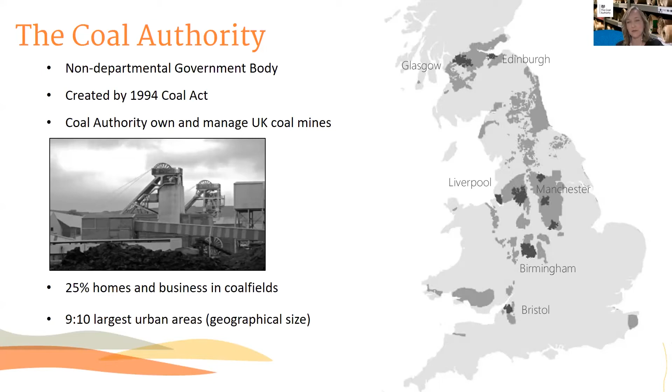So the things that we do: we have a £2.4 billion liability of coal legacies. This includes things like ground stability, so any mine workings collapse, we deal with those. We also pump and treat water and deal with water emergence, which I'll talk about shortly. Through the work that we do on protecting watercourses, we have cleaned over 400 kilometres or protected them from discharges from mine water, and we've also protected a significant quantity of water supply aquifers which overlie some of the mined areas.

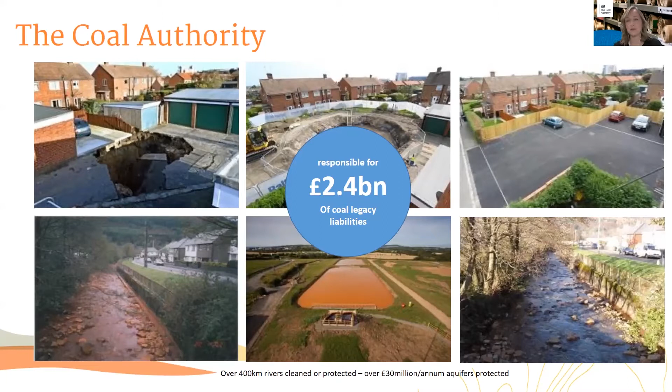So there's an abandoned plan archive which dates from the Coal Mines Regulation Act, which came into force in 1872. So that was a statutory requirement to deposit all of the plans with the Secretary of State upon abandonment. And the picture behind me is actually a picture of our archive, as is the one on there.

Somebody actually asked me the other day whether I was in a fabric shop, which it kind of does look a bit like, because a lot of these very old plans were drawn on linen. So we've got all those stored down in our head office, which is in Mansfield.

And in some places, there's quite a lot of mining. Given the amount of time that mining has been going on in the UK, there was mining taking place before 1872. So in some places we may have what we call unrecorded workings. So if we have records of seams that were worked round about that 1872 time, we can probably infer that there may be some unrecorded workings in the same seams nearby. So we're always mindful of what might be there in these areas as well.

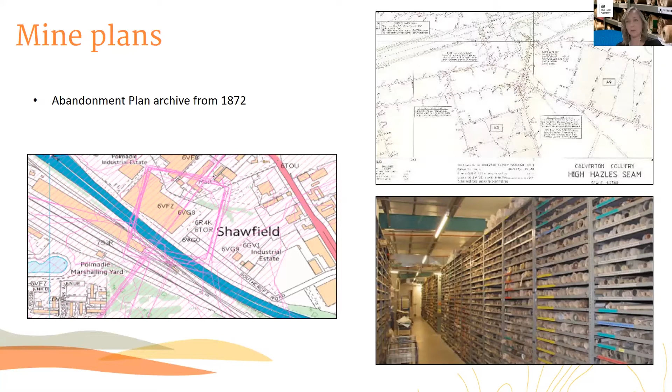In some areas, such as in Northumberland, when I've been looking through our database to get mine plans, some mines are still within private ownership, so they may be owned by a large landowner or estate at the time. So we may not have the plans for all of those, but a lot of stuff we have. The public can come and use our archive, browse our databases by appointment if you ever need any information.

So the coal industry spanned around about 300 years or so of intensive mining, and this ended in December 2015 when Kellingley Colliery in North Yorkshire shut. So that colliery was around about 4 miles away from Ferrybridge, and it was supplying a lot of the coal that was burnt there. That site stopped burning coal in 2016.

And you can see from the graph here, over that 300-year period, we estimate around about 17 billion tonnes have been taken out of the mines. And the coal output over this time has been shaped by various political events such as wars and strikes, technology changes, moving from steam engines to maybe diesel and electric trains, and also alternative fuels, so the dash for gas and cheaper imports of coal from elsewhere.

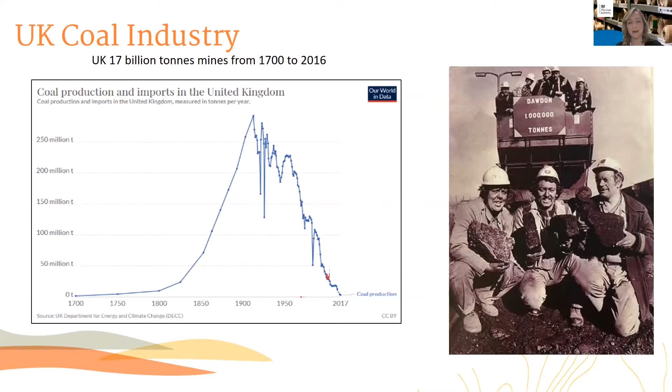So what happens when we abandon mines? Mines are pumped whilst they're worked so that the miners can safely access the coal. Once the mine is closed, the pumps are turned off, and over a period of maybe several decades or so, water levels recover, i.e. they return to a level pre-mining there or thereabouts. But the act of mining has created new pathways through which mine water can emerge at surface or threaten water-bearing formations that lie above them. So that's where we come in.

By monitoring these sites, we're able to see what's happening. So in some areas, for example, Northumberland, the water levels are what we would call recovered. So that means they have now reached a static level and they're controlled by pumping there to keep them at the same level. Some areas are still recovering.

So for example, some areas in South Wales are still rising, and areas where we have water that is still rising means that in future we may need to have more mine water treatment schemes. So we have around about 75 of those across the UK at the moment, but we may need to add more to those. So we treat the water where we need to. When it's of good quality, it may be discharged as it is. If it isn't, we treat it.

The water may flow out under gravity, or at some sites we pump so that we control where it comes out and have the space to treat it if we need to. And we also have PV panels at some of our pumping stations to offset some of our electricity use at those sites.

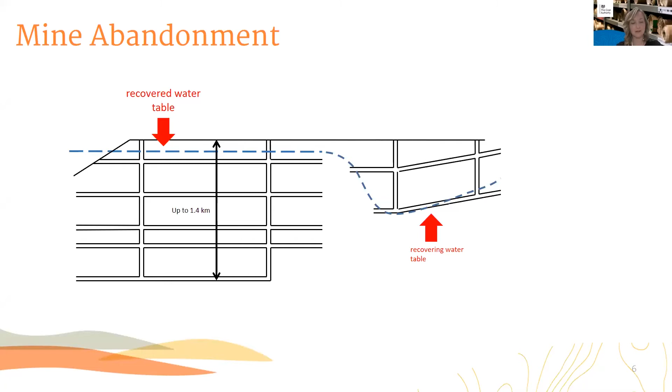So talking about repurposing a legacy, this talk will feature more on the mine energy side of things, but there's also other things we're doing. So in effect, we treat 120 million cubic meters of water per annum. So that's the kind of equivalent to the daily demand of round about 2 million people or so. It's actually a bit over 2 million people. Some of this water is fresh and some is brackish. The remainder is hypersaline, so that's more saline than seawater.

We're also thinking about whether we can use the mines to capture floodwaters and store them underground, and also for water resilience, because last year the Environment Agency predicted that England could run out of water within 25 years. So we're looking at other uses for the water that we pump out.

We also, in our mine water treatment schemes, the biggest challenge for us in the mine water, if it needs treating, is generally removing iron. So that's in the picture at the bottom. Those orange lagoons show where we're getting iron out of solution. This comes from within the coal originally, so it's often associated with pyrite that sometimes you find in coal seams.

And as the water rises up through the mine after abandonment, it can flush iron out of the mine, which is fine until it makes contact with air and then it turns orange. So a lot of the treatment systems we are running rely on getting as much air into the water as possible to get the ochre to settle out. And when it does, we're left with a kind of ochreous sludge in our lagoons.

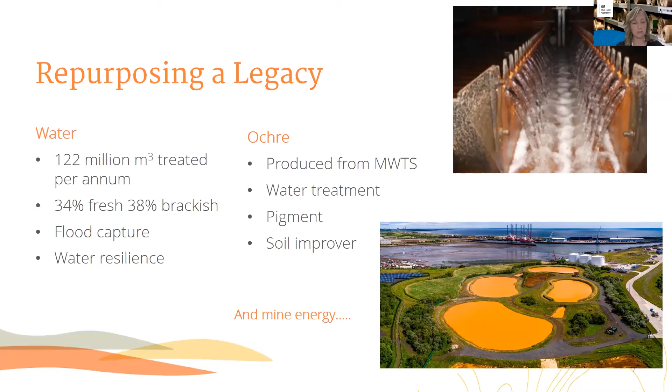It's used as pigments in building materials and also as a soil improver, again, because of its absorptive qualities. So that's some of the other things we're doing in the innovation team. The rest of the talk will focus mainly on mine energy.

So the biggest thing here really with the mine geothermal is that it's different to typical ground source heat, which is sourced from solar energy, which is found within the first few tens of meters of the Earth's surface. So the mine energy comes from a deeper geothermal source generated at the Earth's core. And the temperatures we find in our mine workings go from maybe 14 degrees or so to between 30 and 40 in our deepest mines. So our deepest mine is around about 1.4 kilometers deep.

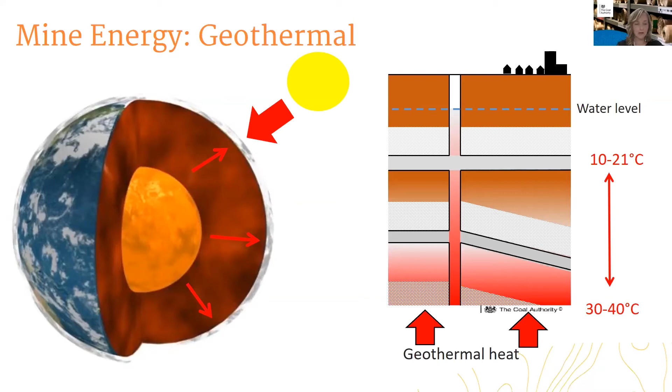And what we find in Durham is, because the coal in the county as a whole is generally shallower to the west of the county and deeper to the east, so it dips out towards the sea and under the sea, we find the age of mines gets younger as you get further towards the coast, which makes sense as technology developed and people were able to mine deeper.

And then more recently, longwall mining methods were used. So that is total extraction of the coal. So you basically drive out a roadway as far as you're going to go and you work backwards across the seam, taking the coal out as you retreat from the mine. And as you're doing so, all the material above you is settling down as you retreat from the mine.

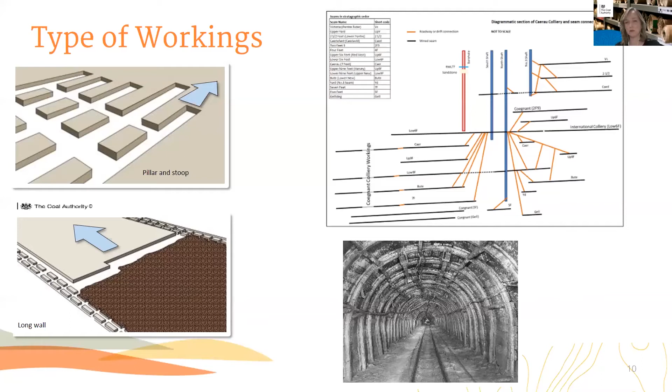Some of these plans are just really beautiful. Lovely things to look at, especially the old ones. And a lot of the colliery managers, I think, were artists because they used to quite often paint their own little scenes onto the maps and annotate them with their own kind of style.

So we have seen instances where people have thought, right, we know there's a seam there, we'll just drill to hit it, but it needs to be a bit more detailed than that. You actually need to target a specific feature within the seam to ensure that you've got the best chance of getting a good flow of water. And ideally for a mine energy project, you want to have more than one seam beneath your site so that you've got one to take water from and one to put water back to.

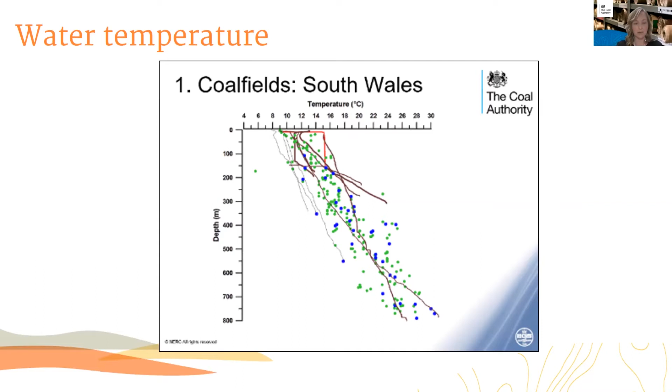So there is a Heat Network Delivery Unit which is funding several feasibility projects for mine energy and other heat producing systems across the UK. So if you're interested, it's worth having a look at their information online about funding available for these types of studies.

And the challenge really in decarbonising heat is the difference between the maximum heat demand in the winter and the low heat demand in the summer. There's around 4,000 gigawatt hours difference in terms of gas consumption. That's about 8 times the amplitude we have between peak and low demand in the electricity system.

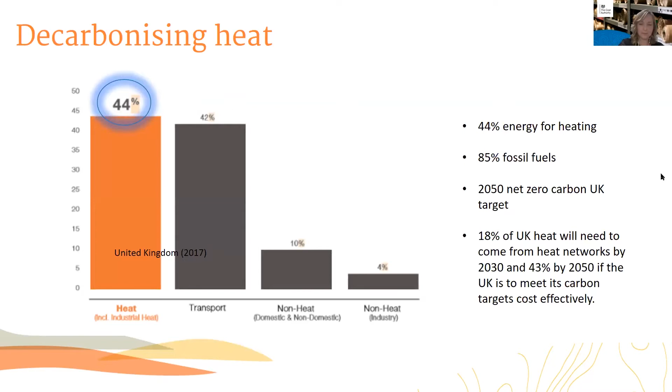So in terms of deploying mine energy, we estimate that there's enough heat sitting in the coal fields to heat all of the buildings that overlie it. We find that there's no interseasonal variation in the source temperature of mine water. So the coefficient of performance of your heat pump system stays constant, unlike an air source heat pump system or a surface water heat pump.

And we found that the two boreholes might actually be quite close together on the surface, but underground, the distance the water is travelling may be of the order of several kilometres. At one site, we've got a separation of 7 kilometres between two boreholes that are very close together on the surface. So it's important to think about that.

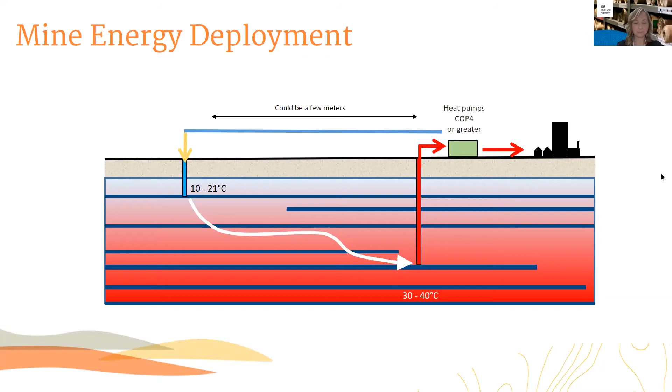As I mentioned before, the temperatures are stable year round, and we would expect for a mine energy system the coefficient of performance of the heat pump to be 4 or greater. We have a small heat pump running at Dawdon, at the pumping station that would be linked to the Seaham scheme, and that currently runs at a COP of around 5. That heats the treatment plant and the offices that are there.

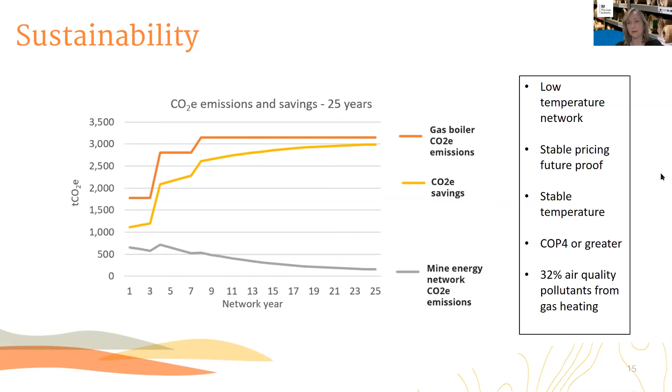And there's also an improvement in local air quality, because using heat pumps you're not burning gas, and it also removes the risk of carbon monoxide poisoning from people's homes. They've got no combustion plant in their homes. They'd either have a heat interface unit or a heat pump within their homes. I'll go into a bit more detail on that later on as well.

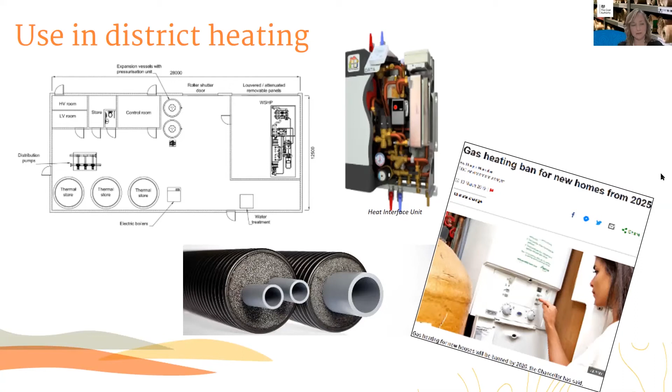Because it runs at lower temperatures, with the mine water being a lower ambient temperature, it's got much better efficiencies, because you've got lower losses in your pipe network, because you're running everything at a much lower temperature. And if the ban on gas goes ahead, then it does offer an alternative that can be used at scale to produce heat in former mining areas if gas is no longer an option.

Some of the opportunities we've been looking at, so how it would integrate with heat networks, is the Seaham project, which I'll talk about later. That will work on a circulation temperature of 60 degrees with an energy centre, and the connected buildings will have heat interface units to take the heat. We can run that on non-metal pipework, so that brings down the cost of installing the heat network and just makes it a bit easier to do as well. People are not having to try and weld metal pipes in confined spaces underground.

And also the boreholes, or the source of the mine water. For the Seaham one, we're using water that we already pump, but if you were to put boreholes in, you'd need to have them near the energy centre where the heat pump would be. But we're also exploring decentralised models, which link with this new idea of ambient loop systems, or 5G networks as they're sometimes called. There you're circulating a loop of water at ambient mine water temperature, and the heat pumps are in the connected buildings, at the point of use, or maybe there's clusters of buildings sharing one.

It offers some flexibility, because you can grow out the system as demand increases. Because it's low temperature, again, you can use non-metal pipework. And the other thing here is that you can put the boreholes more or less anywhere on your heat network, so they can tap into it at any point, which for us is really good, because we're very much dictated by what targets are available in the subsurface.

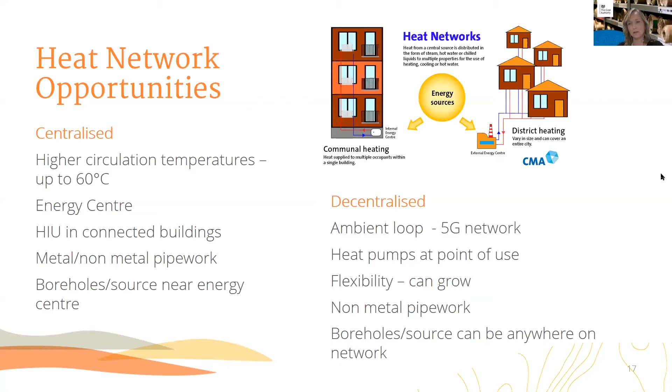So thinking about the potential and looking at a bigger system, we can integrate various different energy sources and demands. For example, we could use renewables. If you had wind turbines that weren't generating electricity, you could switch them to generate heat and store that in the subsurface. Same with waste heat from data centres, or energy from waste plants, and also sewage treatment works are a source of heat. So we're looking at whether this can be stored underground, and then using the mine workings almost to transmit the heat to other areas.

And so then you could have a development of homes drawing the water off, and you could also have something like a horticulture project. We're quite interested in looking at mine energy for horticulture projects, because it offers an opportunity to increase our food resilience.

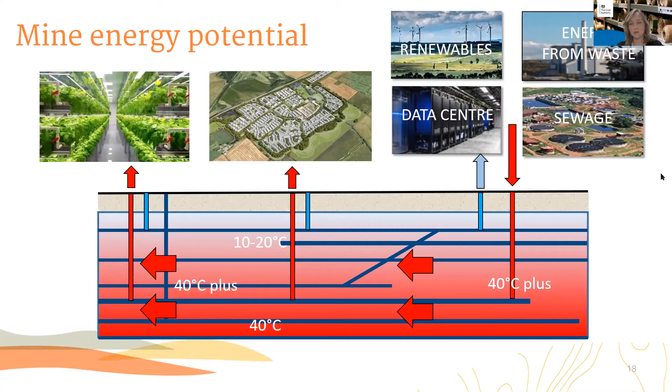So thinking about the mine shafts and the opportunities relating to those. We have 177,000 known mine entries, and by mine entries they may be adits, so horizontal or sub-horizontal tunnels, or shafts. There are more shafts than adits. There's around 134,000 mine shafts. Some have been filled in, some are open, so we have to look carefully to see what's available in a particular area.

But we've got a lot of interest in using these for various different things, so we're looking at them for thermal storage. We've also been asked about hydrogen storage, and about the potential of dropping weights down for electricity production. We've got a shaft in Scotland that we're looking at, which has the potential to heat over 1,000 homes for a period of several days.

So we're keen to try and get some project running there, where we'd probably put something like solar hot water into that to boost the temperature of the mine. And we're looking at some research that's been done in Germany to see what the maximum temperature we could take the mine up to is. And it looks like something like 60 degrees is quite doable from a geochemical point of view in terms of how it might change the water.

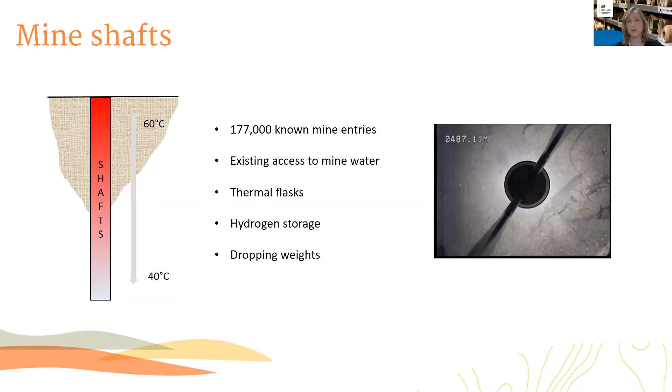Also, we've been speaking to some people who work quite a lot on heat networks, and because the mine water shafts are very tall and thin, they've got a really good thermodynamic performance because they stratify quite well, so you can put your hot water in at the top and have your cooler water at the bottom, and they don't get too mixed up, which is what you want. The more stratification you get, the better, because you store higher temperatures at the top of the system.

So some of the opportunities that we have, we've got places where we either pump water or it flows under gravity, so that's immediately available. Proven, because we've usually got records about how long they flowed, what temperature they flowed at, and the water quality, which may go back a decade or more. The challenge here is where the location is. So are they located to where the heat users may be? So we have some that are, and also there's a potential for any new schemes to consider whether there's any loads nearby.

Then you can have kind of single installations. So the benefits of doing that is there's one client and end user, so it's quite simple. It's probably the client that's developing the site, so it's a simple situation. The location can be a bit more variable, subject to the workings. We can have a look for the best site within the boundary. The cons are it can be expensive drilling boreholes, so for a single building it needs to be something maybe like a leisure centre where you've got a high energy demand, so you're getting the maximum benefit from it.

And then the most complex in terms of risks and returns are heat networks, because they offer opportunities of scale, but you've obviously got a lot of customers there to deal with. Is it new build? Is it retrofit? There's new business opportunities for people to come in and sell the heat, so maybe a local authority would be interested in selling the heat to the customers. There's other opportunities. You could have horticulture projects running nearby. There could be job creation from that. So the heat networks and associated businesses we see as being potentially quite valuable.

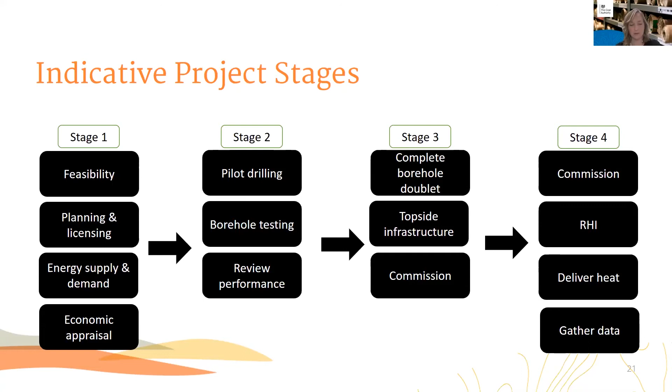So on optimizing projects, there's lots of things you can do to increase the chances of success. So basically, the more heat you can use from your mine energy system, the better. So you want a range of customers and a range of demands. You want some anchor loads that are going to be there all the time and have a known demand. You can also cascade the use. So in this example, you could take the water out, take 5 degrees out to heat homes, take a further 5 degrees out to heat a glass house, and then either reinject the water or discharge it depending on what you're doing.

Also, if you can have energy storage in there, then obviously that really increases the economic performance of the scheme. And some of the social drivers as well. So are you addressing fuel poverty? Are you delivering heat to areas that were hard to treat or didn't have gas before?

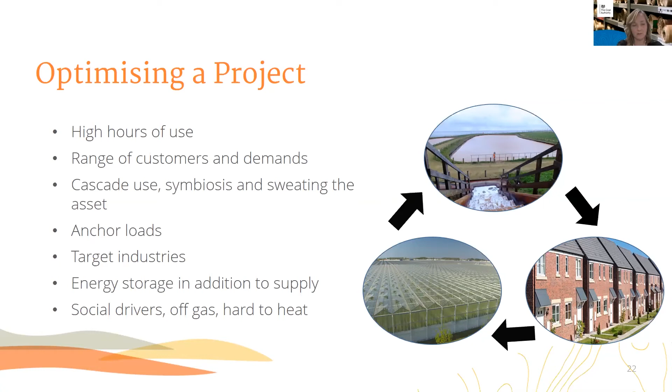The challenges are the RHI, which for non-domestic projects pays out just over 9p a kilowatt hour for the heat produced. So that obviously is really good for offsetting the capital costs and the running costs when you put in a mine energy system. Interaction between state aids and subsidies, sometimes there's conflicts there. Lack of heat networks at the moment and the markets and regulation that go alongside them.

And also trying to replace these really labour intensive industries. So mining obviously employed a lot of people in mining areas. What can we bring to those areas now through developing energy systems? Is there any potential there to develop new jobs and bring in new opportunities as well?

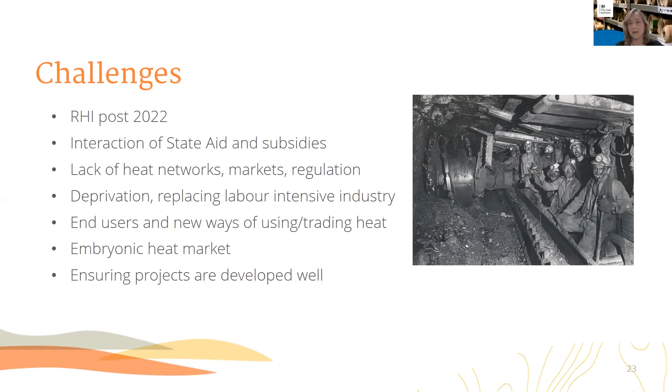Getting end users to think about using heat differently, so they might not have a gas boiler, they might have something else in their home, and they might not buy gas, they might buy electricity, or they might buy energy as a service. And also making sure that projects that are developed go well, because we're at the stage where we've got a few going ahead now, and these will be exemplars, so they need to work really well and be done the best we can.

So the mine energy opportunities, there's about 30 projects happening across the world already, and one in the UK at the moment, which is at Lanchester Wines. They produce, I think, just under 4 megawatts of heat. And we've got quite a few going on. This list has actually increased since I put this together because it's going up quite quickly. We've got a lot of opportunities and a lot of interest in this. And we're hoping that some will be breaking ground this year, so there will be some drilling going on towards some of these projects this year.

So just a couple of examples of some of our projects. So Seaham Garden Village is one, and we have a pumping system up at the right there. So that's the Dawdon Mine Water Treatment System. Dawdon Colliery closed in 1991, and we already pump and treat the water there before discharging it to the sea. So the idea here is that we'd intercept the water before it goes through the treatment system just to take the heat out of it, and then the heat from the mine water would then be passed through the heat network that serves the homes.

The first phase will have 1,400 homes, half of which will be affordable. And in the homes, we plan to have an energy centre that will circulate water at 60 degrees on an all plastic network. And in the homes, people will have a heat interface unit and normal radiators. So they won't see any difference in what they've got in the home apart from the heat interface unit. But in terms of radiators and how they get their heat, it will be as familiar as possible. So this project's being led by Durham County Council, and Tolent are the owner of the site at the moment.

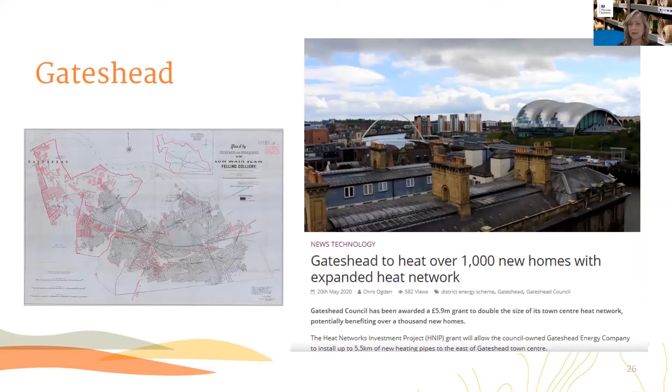And also this one, which has been in the news lately, we're very excited to be working with the guys at Gateshead. So this is a really exciting opportunity to extend their heat network, and we're currently working with them on that scheme as well. So that's really exciting. We'll be putting one of our own boreholes in this area, so we can find out a bit more about how the mine water system's working in this area, to support what the council are doing here as well. There's also another project which I think has been in the news recently as well at Seaham. So the northeast is actually becoming a real hotspot for mine energy, which is fantastic.

So hopefully through what I've shown you here we've turned what has been viewed often as a liability into something which is an asset and could be very important in delivering lots of things to the UK, on the energy side, on the resilience side, and also in terms of the social aspects, public safety, job opportunities, taking people out of fuel poverty. So obviously I'm just presenting one solution here for decarbonising heat, but it is very compatible with the low carbon technologies and both sources of heat and electricity, particularly if we can capitalise on the storage potential in the subsurface as well.